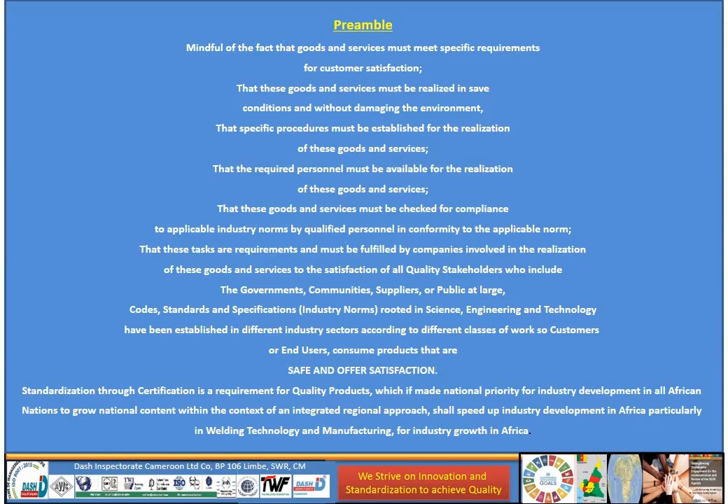I usually ask myself this question: why is it that the United States has been an all-time giant nation on the planet? And I see the answer is very clear. It is thanks to industry in all industry sectors.

And to go by the President of the Republic of Cameroon, President Paul Biya, this is what he says about industry: there is no great nation without a vibrant industry. That's Paul Biya, President of the Republic of Cameroon.

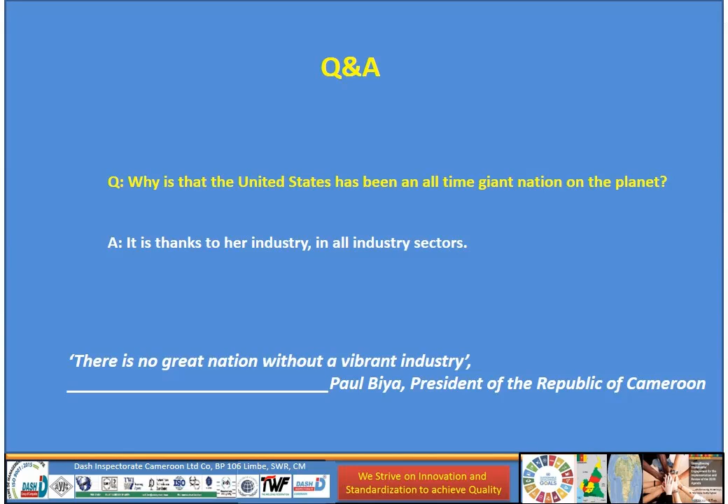Every nation relies on industry for its social and economic stability. This industry is made of different industry sectors: oil and gas, petrochemicals, pharmaceuticals, maritime, aviation, automobile, food and agriculture, textile, etc. And these industry sectors are made of different classes of work: pipelines, oil tanks, earth-moving equipment, food processing, etc.

Execution of tasks in these different industry sectors depends on skills. Thus, acquisition of these skills is an absolute requirement. These skills must be properly imparted in conformity with industry norms, code standards, and specifications, and must be constantly monitored to ensure optimum service performance of industry personnel at all times.

Thus, quality assurance ensures that manufactured, fabricated products and services are safe and offer satisfaction. In fact, the importance of training and certification following regular education cannot be overemphasized if we want to meet these industry objectives. The world today is rapidly advancing in science, engineering, and technology.

Material science is rapidly evolving with constant development of new materials to address service criticality. For example, stainless steel materials are gradually giving way to reinforced fiberglass materials, thus curbing the very worrisome corrosion problem typical of petrochemical, refinery, upstream and downstream environments, etc.

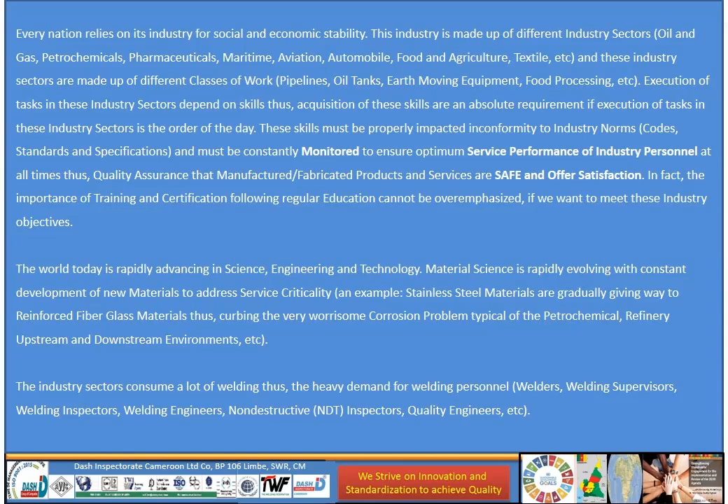The industry sectors consume a lot of welding, thus the heavy demand for welding personnel, that is, welders, welding supervisors, welding inspectors, welding engineers, non-destructive inspectors, quality engineers, etc. The welding industry.

Welding, the fusion of surfaces of two workpieces to form one, is a precise, reliable, cost-effective, and high-tech method of joining materials. The weld, a permanent coalescence formed between a joint during welding, must possess soundness to ensure structural integrity so the fabricated component shall perform in service to design specifications. No other technique is as widely used by manufacturers to join metals and alloys efficiently to add value to their products. Most familiar products in modern society, from buildings and bridges to vehicles, computers, medical devices, and equipment, cannot be produced without welding.

Welding goes beyond the bounds of its simple description. Welding today is applied to a wide variety of materials and products, using advanced technologies such as lasers and plasma arcs. The future of welding holds even greater promise as methods are devised for joining dissimilar and non-metallic materials and for creating products of innovative shapes and designs.

The welding industry consists of users of welding techniques as well as companies, universities, and other organizations that provide equipment, materials, processes, and support services for welding.

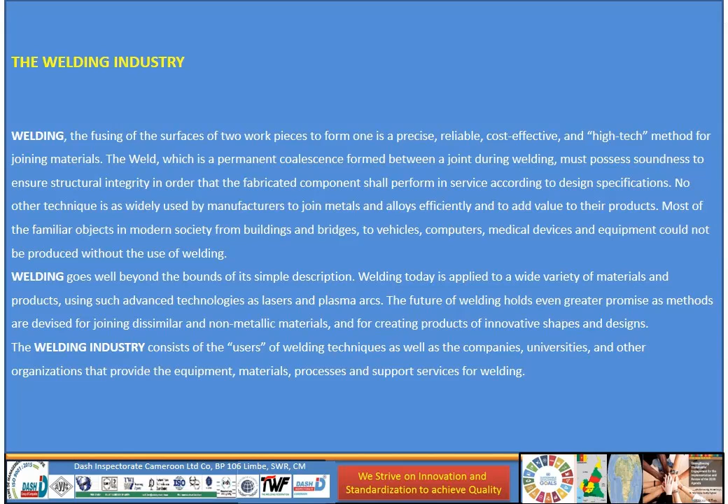Weld quality: welding is a joining process that produces a local coalescence of materials by heating, by applying pressure, or both. In essence, the welding process fuses the surfaces of two distinct elements to form a single unit. It encompasses a broad range of joining techniques including fusion welding, solid-state welding, weld bonding, diffusion welding, brazing, and soldering.

As indicated earlier, a weld, which is a permanent coalescence formed between a joint during the welding process, must possess soundness to ensure structural integrity so the component shall perform in service according to its design specifications. This involves the use of certified welders and welding operators who have the skill and technique to deposit sound welds according to a welding procedure specification.

The welding procedure specification is a written document established by a manufacturer or fabricator's welding engineer that contains required variables to be respected in the realization of a particular weld, tailored to a code or standard, and changes to which are not allowed. Respecting the welding procedure specification assures that the realized weld possesses the required metallurgical structures and mechanical properties necessary for structural soundness and service performance of the manufactured or fabricated component.

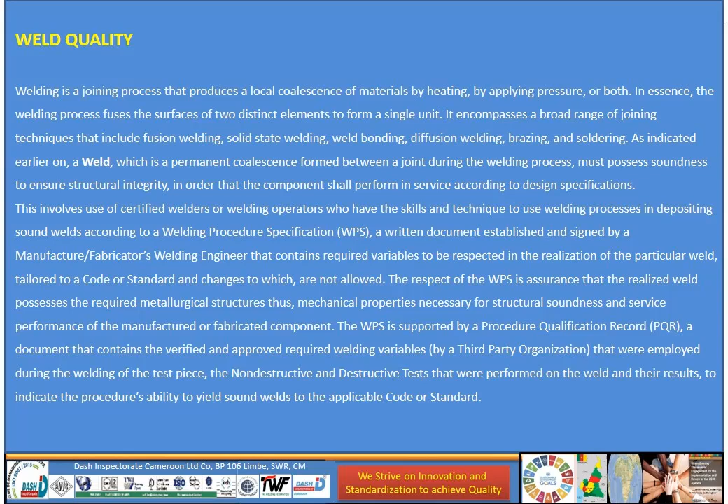The welding procedure specification is supported by a procedure qualification record, a document that contains the verified and approved required welding variables, approved by a third-party organization for instance, that are employed during the welding of a test piece, the non-destructive tests performed on the weld, and the results indicating the procedure's ability to yield sound welds to the applicable code or standard.

Many companies involved in fabrication, manufacturing, and construction still fail to understand the importance and use of the welding procedure specification, procedure qualification records, and certified personnel—that is, the respect of quality codes and standards. These manufacturers or fabricators instead rely on routine experience or trial and error in the fabrication of weldments and components.

In a world of rapidly evolving and advancing science, engineering, and technology, material science is rapidly evolving, with new materials constantly being produced to address service criticality. The non-respect of the welding procedure specification compromises structural soundness of the manufactured or fabricated component, leaving the safety of the client or purchaser at the mercy of the component, as it can consequently fail, such as sudden collapse of a storage tank or a breach, sudden collapse of a building, sudden fracture of a repaired vehicle part, or leakages in pipelines or piping, etc., in service at any time without warning signs.

Great issues in the industry timeline have put welding and material joining processes into question—that is, material mechanical properties like toughness, and in fact the importance of welding procedure qualifications. The sinking of the unsinkable ship, the Titanic, on its first voyage on 14 April 1912. Then there was the failure of the Liberty ships during the Second World War, in 1945.

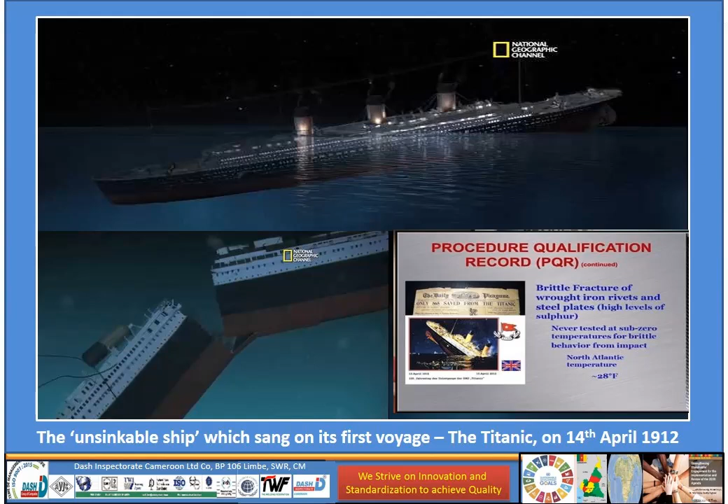Look at the failure of the Titanic. What happened? Brittle fracture of wrought iron rivets and steel plates which had high sulfur content. They were never tested at sub-zero temperatures for brittle fracture from impact. In the North Atlantic Sea, temperatures dropped to 28 degrees Fahrenheit, causing brittle fracture—that is the unsinkable ship that sank on its first voyage on 14 April 1912.

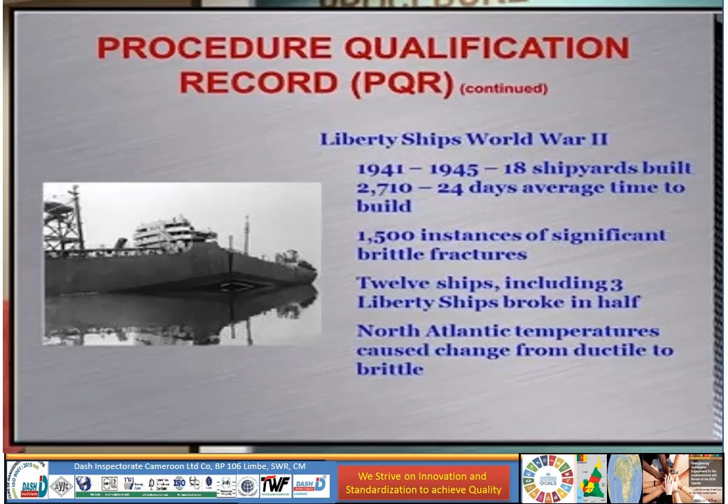Then we have the failure of the Liberty ships, from 1941 to 1945 during the Second World War. So many ships were constructed at an alarming pace. The failure of these ships was related to brittle fracture, as temperatures in the North Atlantic Sea dropped to near zero, causing brittle fracture—that is the ductile-to-brittle transition.

Total welding management is a system-focused approach to improving welding quality assurance. It includes management principles and a planning process with a structured approach. When adopted by a company, it can improve welding quality and productivity, helping a company become more competitive and more profitable. Companies involved in manufacturing, fabrication, and construction are encouraged to adopt total welding management for these benefits.

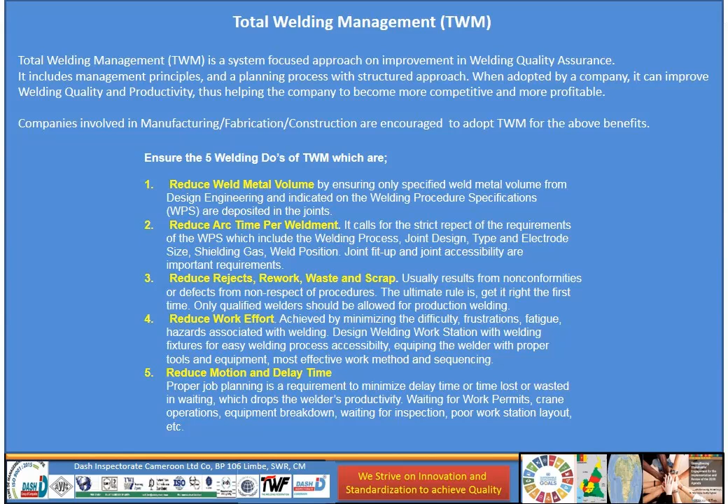To ensure the 5 welding Do's of total welding management: 1. Reduce weld metal volume. 2. Reduce arc time per weldment. 3. Reduce rejects, rework, waste, and scrap. 4. Reduce work effort. 5. Reduce motion and delay time. This total welding management is key for a company's resounding success in welding.

This involves the procedure qualification record, the welding procedure specification, and the welder performance qualifications. There is a case study here to demonstrate the importance of respecting the welding procedure specification, using the bend test machine to demonstrate the importance of fusion welding in our components.

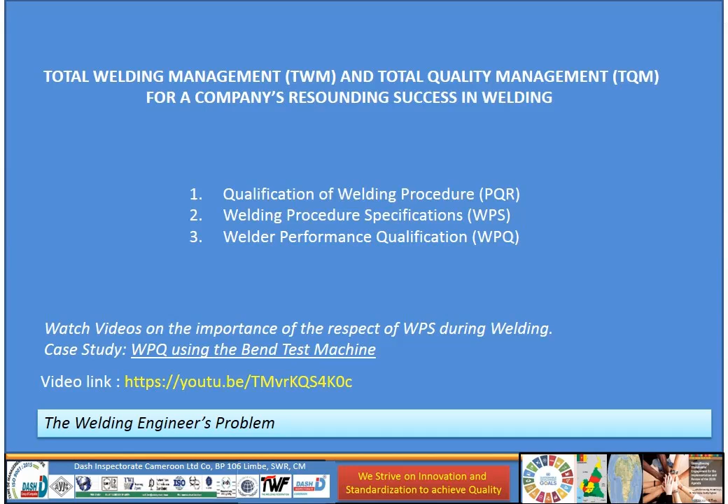Welder performance qualification, that is the welder certification test. Let's look at what that is. The welder qualification test is the verification of a welder's ability to use a welding process to deposit sound welds following a welding procedure specification. Stage 1, you have the welding of the test coupon.

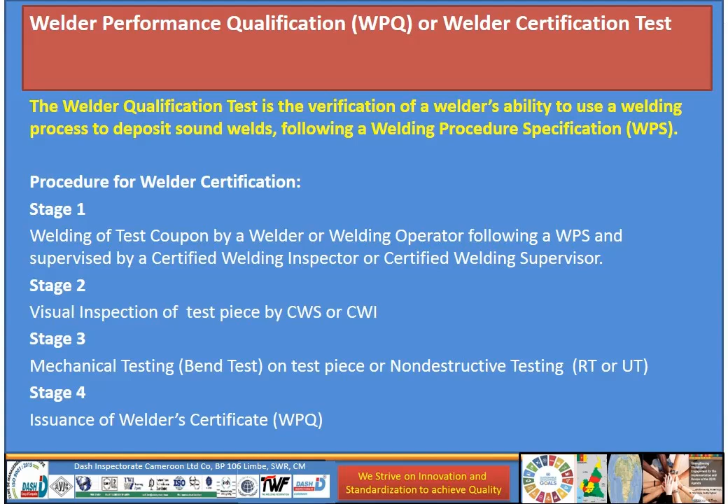You have the visual inspection, and the mechanical tests that are performed. Then you can have the volumetric test and the issuance of the certificate. Look at the process there. The test can be done on pipe or on plate.

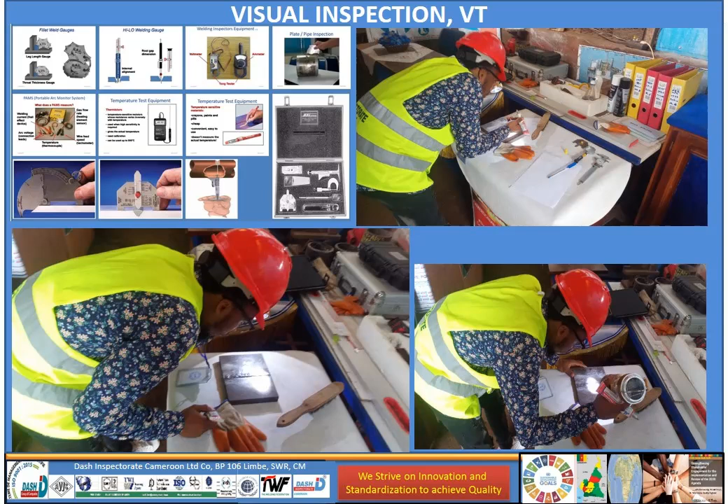You have the visual inspection there, focusing on the bend test. I'm laying emphasis there, demonstrating the importance of respecting the welding procedure specification, so we attain the mechanical properties that are desirable in the deposited weld metal, to meet the design specifications.

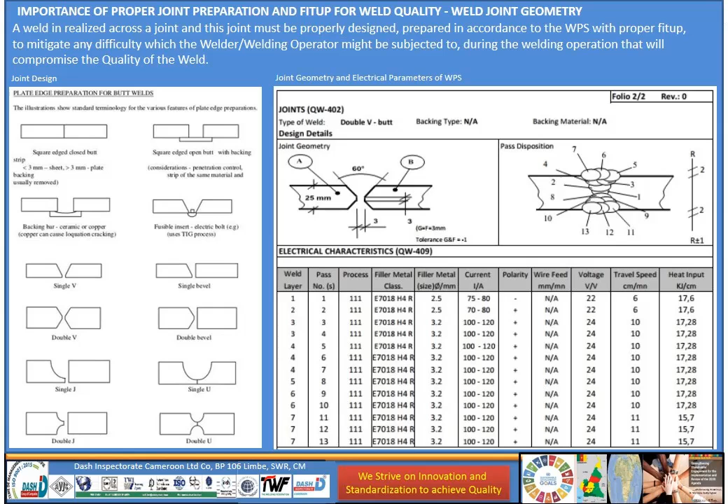To attain this, you must have the required heat input, which is very important. All of this is documented in the welding procedure specification we saw earlier, attained by use of the electrical parameters, because the joint needs to have the required depth of fusion expected. For butt joints, the depth of fusion, and for angle joints, this might be required to be attained, which is very important.

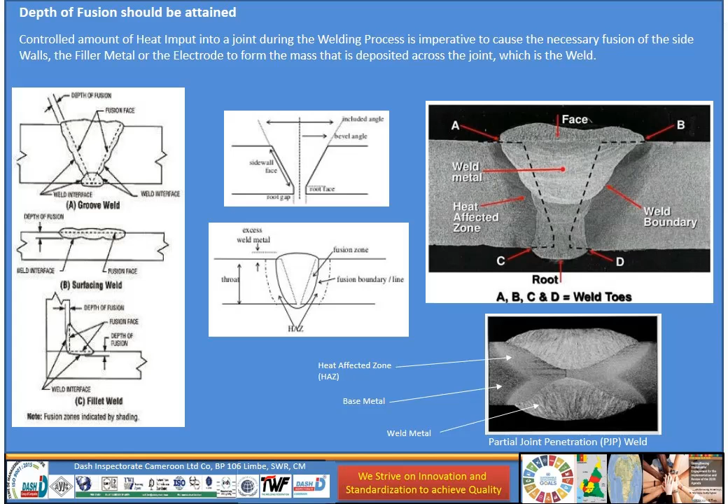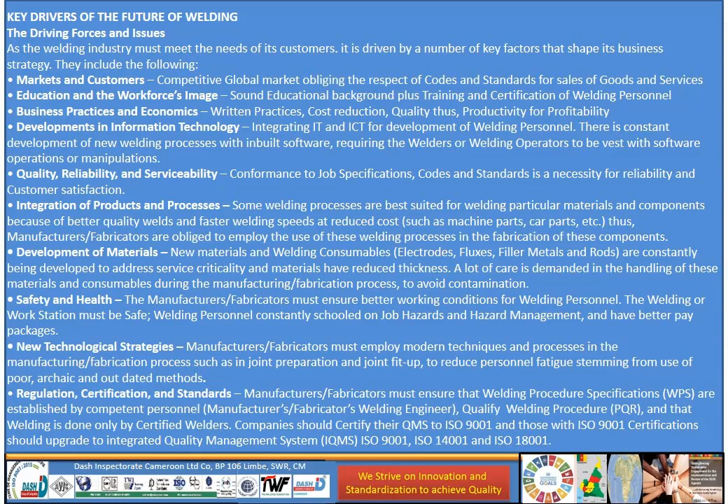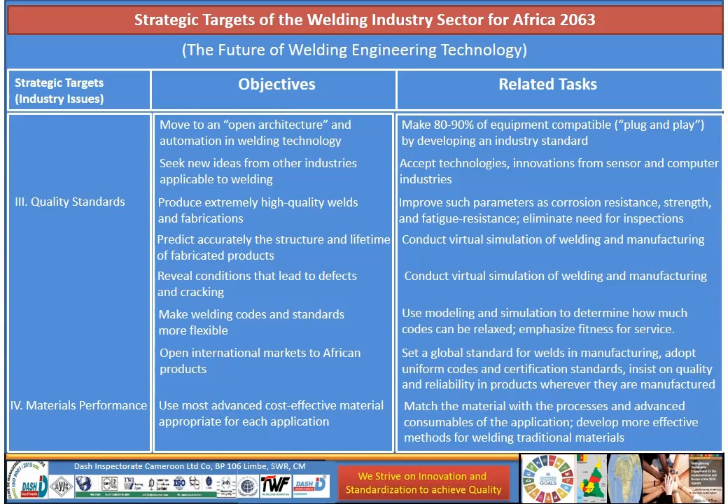materials performance; 5, markets and applications; 6, education and training; 7, energy, environment and health and safety.

So in these areas, in these different targets, we have the different objectives that must be met, okay, and the related tasks that must be done.

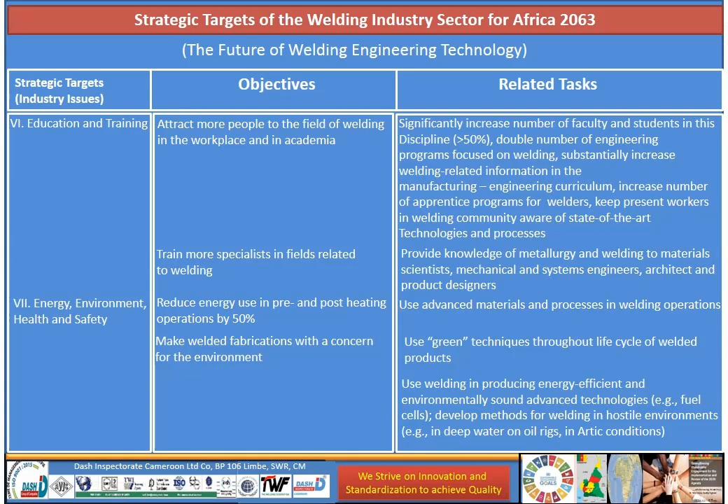Let's look at key competitive challenges, that is, looking at competitive challenges of the welding industry in Africa. In order to meet the ambitious strategic targets set forth, the welding community must be able to hurdle certain barriers or competitive challenges in the following areas:

materials, manufacturing, integration, workforce integrity, and quality.

Let's look at the materials. As materials are developed with increasing strength, corrosion resistance, and other performance factors, welding them becomes more and more difficult. Filler metals, pre and post weld heat treatment, and other techniques make welding feasible in many cases, but at substantially increased cost. The challenge is to make these materials as easy to join as simple carbon steels.

The industry wants 95% of these materials commonly used today by manufacturers to have a corresponding alloy that can be welded very easily, that materials have good weldability. Advanced computational methods will be used to engineer materials that can be welded easily and consistently.

Research will be needed on filler metals along with pure metallurgical research in order to understand the behavior of materials at the atomic level. For instance, solutions found to overcome the mechanical degradation of aluminum alloys by the welding process. With a new level of understanding of metallurgy, the entire welding industry will benefit and progress.

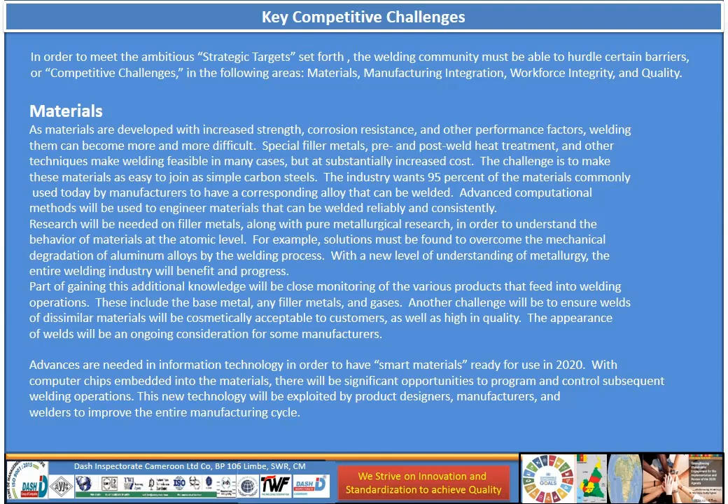Product design, development, and manufacturing integration. The virtual factory is a term that will be heard frequently over the next 20 years as computer modeling and simulation tools become commonplace in welding operations. Welding will move from being an art to being a manufacturing science with the help of computers.

The virtual factory will occur with welding technologies when welding technologists go outside the traditional scope of welding to better understand, control, and automate welding processes. Modeling will help workers predict when the welding process will be robust and the conditions under which it becomes distorted.

Designers will also contribute to the virtual factory. They are accustomed to using simulation tools in designing products and processes for manufacturers. These tools also allow welds to be modeled. These models can then be integrated into more comprehensive informational systems used in manufacturing.

By integrating welding operations with product design and other manufacturing steps, the welding stage will no longer be isolated from the entire manufacturing process. The image of joining as the weakest link in any product must disappear, as it becomes an important but routine step during manufacturing.

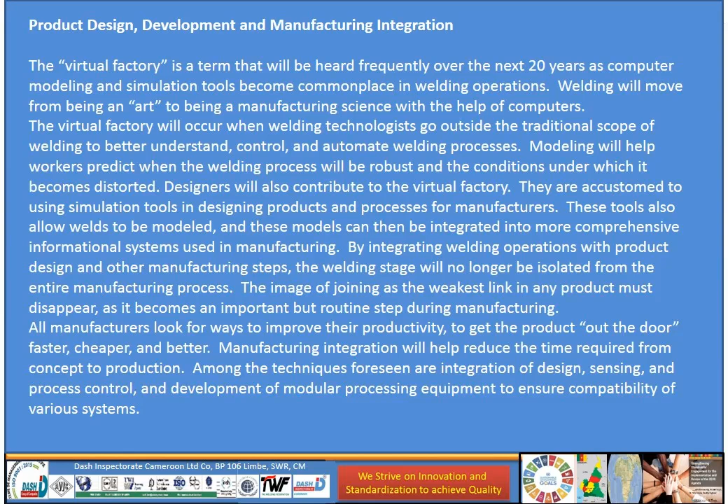The attractiveness of welding as a vocation and engineering profession is meant to improve. Industry believes that success meeting these challenges will be important in determining how Africa competes in world markets.

A workforce that is appropriately educated at all levels will drive a technological revolution in welding in Africa. The prestige and promise of welding as a career will grow as welders are certified to guarantee their capabilities, and engineers gain greater appreciation of the practical potential use of welding.

Multidisciplinary teams will provide a supply of necessary talents from design to engineer to operator to welder. Workforce integration will see customers, manufacturers, educators, and possibly the government collaborating and developing ideas for new products and ways of using welding techniques. The communication amongst these various experts will be key in removing barriers to smooth manufacturing operation.

For example, with customers more knowledgeable and aware of the welding process, there will be greater participation by customers in new product development and in exploiting the potential of welding. Engineers working side by side with welding technologists will better understand the importance of their role in manufacturing. New welding-related knowledge must be widely disseminated among all interested parties, and a better educated workforce and the team approach in manufacturing will help meet this challenge.

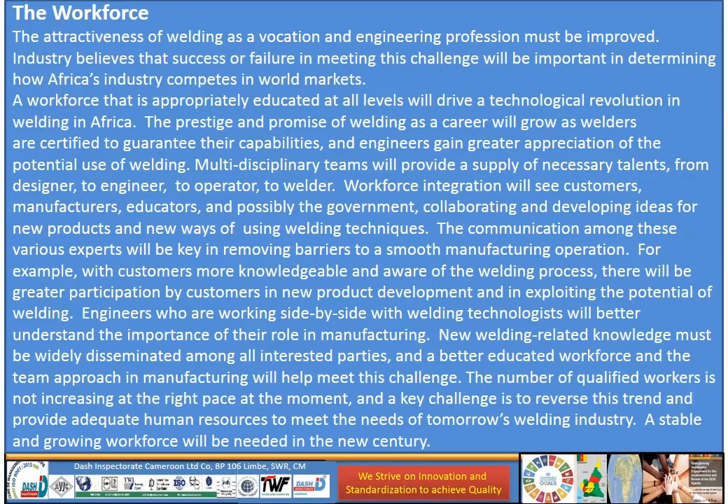Quality. Improvement in the quality and reliability of joints will help overcome the image problem of the welded joint as the weakest link in any structure. For the industry to move ahead, it must remove the perception of manufacturers, customers, and others that welding is a barrier to a smooth manufacturing process.

Another challenge is that academia typically does not accept primary metals and the primary production industries as worthwhile academic pursuits. Faculty and students are not entering the field. The academic expertise in these disciplines will eventually be non-existent. Again, a better understanding of the quality and usefulness of welded metal products will help overcome this negative perception.

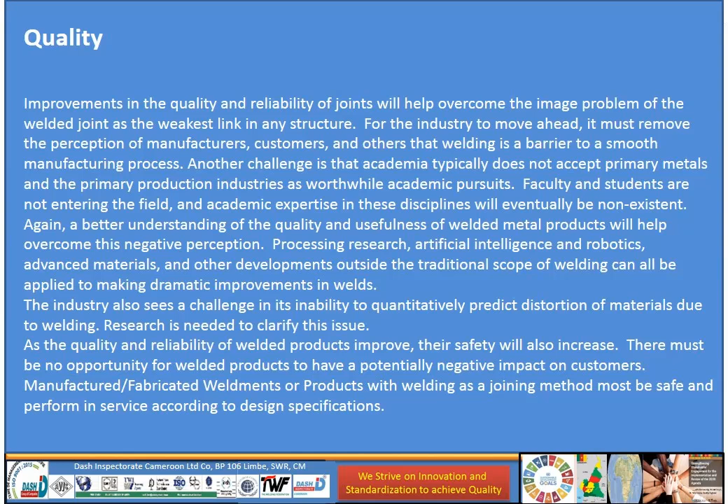Processing research, artificial intelligence and robotics, advanced materials and other developments outside the traditional scope of welding can all be applied to make dramatic improvements in welds. As the quality and reliability of welded components or products improve, their safety will also increase. There must be no opportunity for welded components or products to have a potentially negative impact on customers. Manufactured fabricated weldments or products with welding as a joining method must be safe and perform in service according to design specifications.

Welding industry personnel, education, training, and certification. The welding sector, like every other sector, requires competent personnel for its operations, and these industry personnel who are involved in the science, engineering, and technology of welding must have sound education, be properly trained and certified.

The universities, polytechnics, and vocational centers have an important role in training. However, third-party organizations such as the Dash Inspectorate, the Welding Federation for Africa, American Welding Society, and a host of other third-party organizations have played a unique role in training and certification.

Education versus training. In teaching and improving professional competence, education should not be confused with training, as they apply to different aspects of developing welding professionals. The etymology of the word education clarifies the difference. According to Webster's Dictionary, the word comes to us from the Latin word educare, meaning to rear, to lead forth, to draw out something of potential.

It can also mean to persuade or condition one to feel, believe, or act in a particular way. The implication is that education can be practiced at home, primary, secondary, and post-secondary schools.

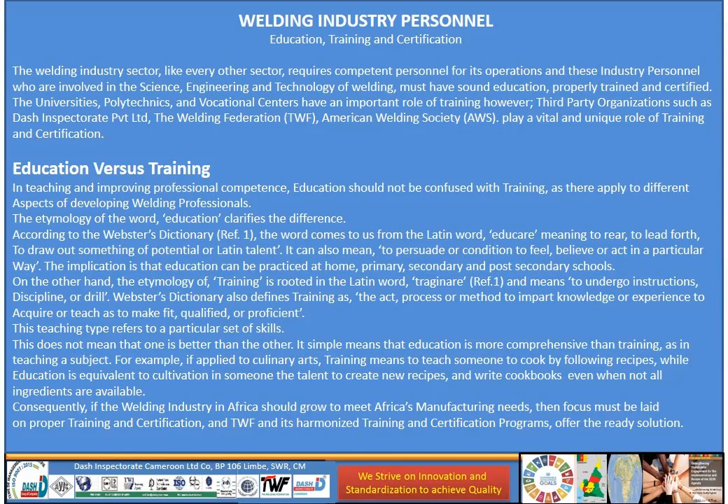Consequently, if the welding industry in Africa should grow to meet Africa's manufacturing needs, then focus must be laid on proper training and certification. And TWF and its harmonized training and certification programs offer just the ready solution. I rest my case. Thanks so very much.